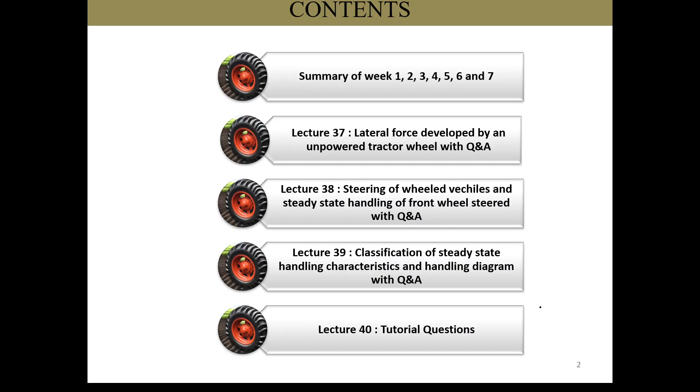I have given this recap many times before. So today I am showing you all the PPTs, and I'll check how much you have remembered. This is the week 1 presentation. If there is any MCQ, then I will ask you.

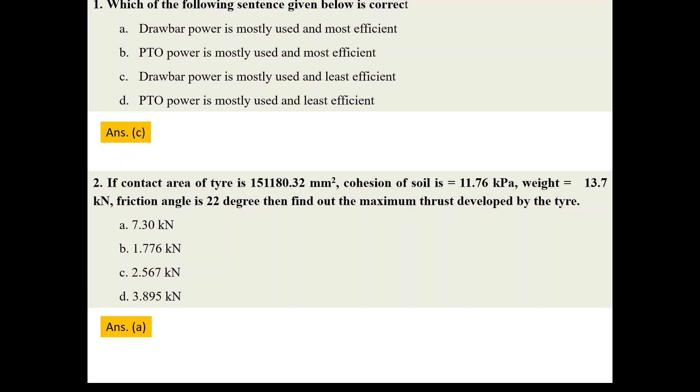I think this is easy. Which of the following sentences can be used correctly? These things are easy. Now in week 2.

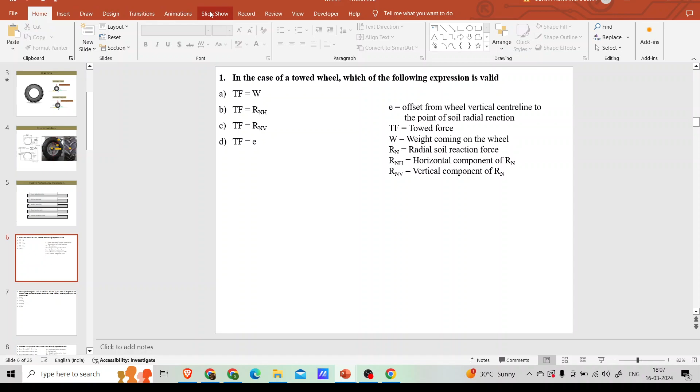Traction. What is the answer of this question? In the case of a towed wheel, which of the following expressions is valid? Do you remember, Sivaram? As this is the last lecture, I'm just giving a recap. In case of a towed wheel, which of the following expressions is valid? Do you remember, Sivaram? Any guessing? In case of a towed wheel, weight is acting, towed force is there, and torque is zero.

This towed force is being balanced - it balances the rolling resistance, and ground reaction is acting. If R is the ground reaction, then this is RNH or RNV? See what I mean? In case of a towed wheel, yes sir, which option is correct? Towed force is being balanced by the horizontal component of the ground reaction, RNH. So TF is equal to RNH.

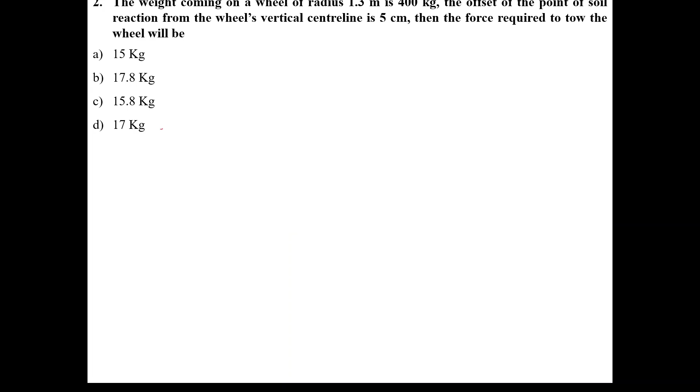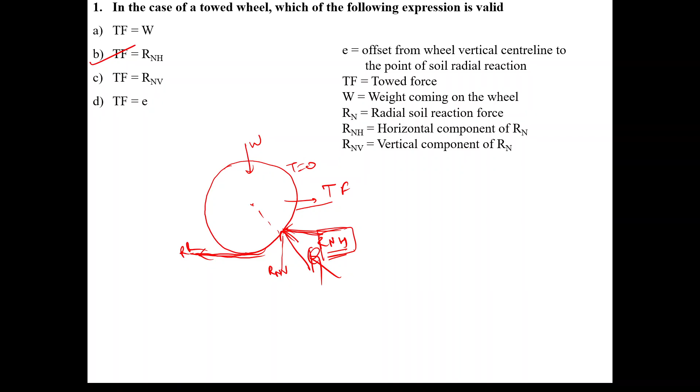Do you remember these concepts? I think you have forgotten. I need to revise those once again. That's why, for revision only, I am asking you these questions. You revise here, no issue. Just try to solve with me. This is numerical, we will leave it.

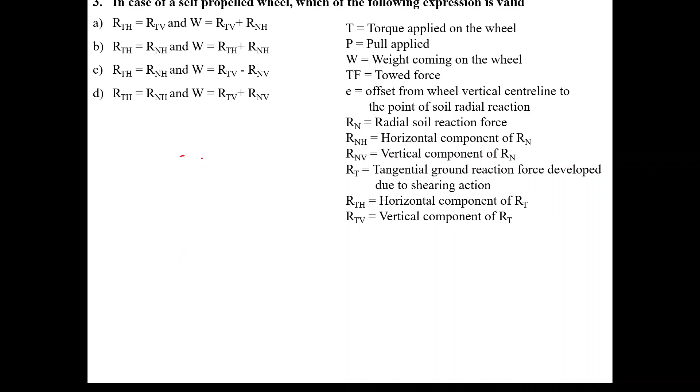In case of a self-propelled wheel, which of the following expressions is valid? Do you want to solve it or shall we move on? In case of a self-propelled wheel - okay, you just tell me the concept of a self-propelled wheel. What is a self-propelled wheel? I'm asking you just orally - if you are being asked what is a self-propelled wheel, what will you answer?

The self-wheel can produce its own torque, sir. A self-propelled wheel is a wheel in which there is no pull - without pull, just torque is being given to it. Means power is being given to the wheel, and there is no pull attached to the wheel. That is a self-propelled wheel. And what is the driving wheel or powered wheel?

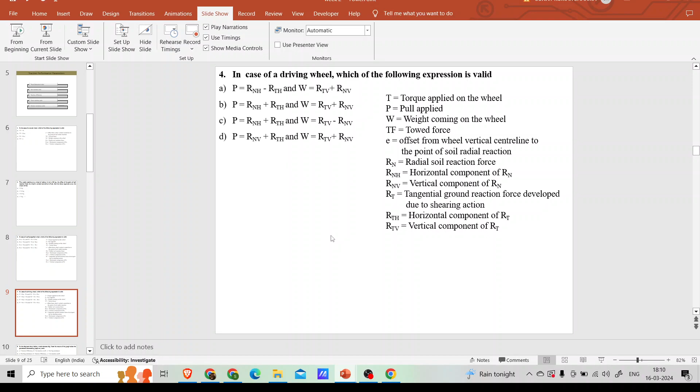Driving wheel or powered wheel - the pull is attached to the wheel, and that is powered. That is a driving wheel. Means pull is also there, and torque is also there. That is a powered wheel. Okay, solve this question just for a revision.

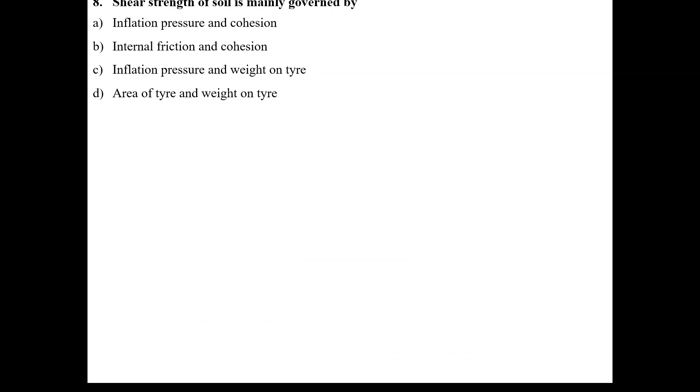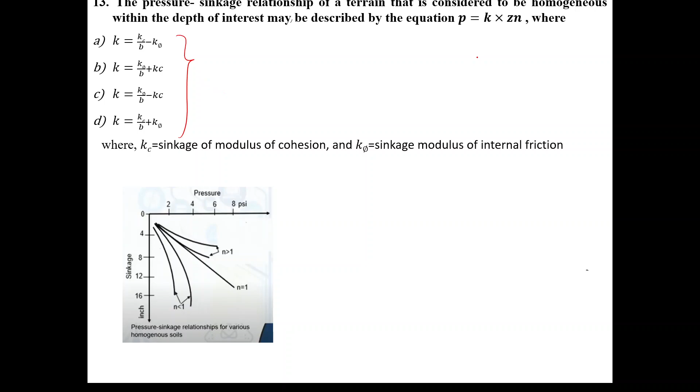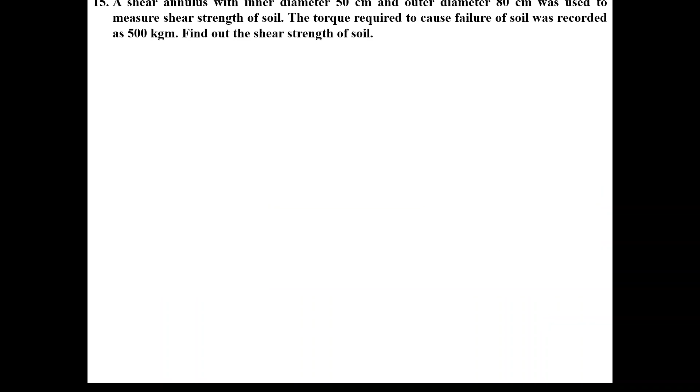This is also a simple system. You will solve the marky things. Okay, what is in this equation? Which of the following is the correct equation? Option D, sir - K is Kc by B plus K phi. This we have already solved.

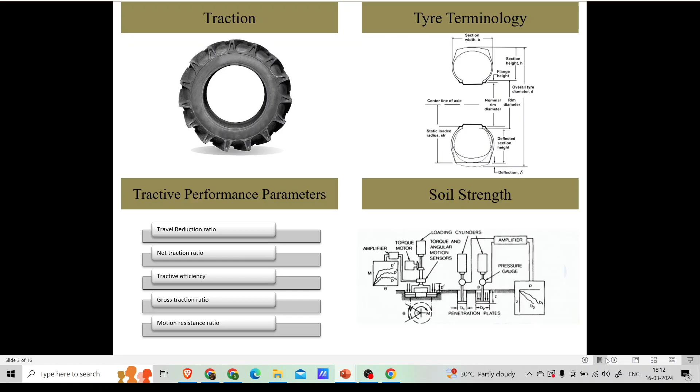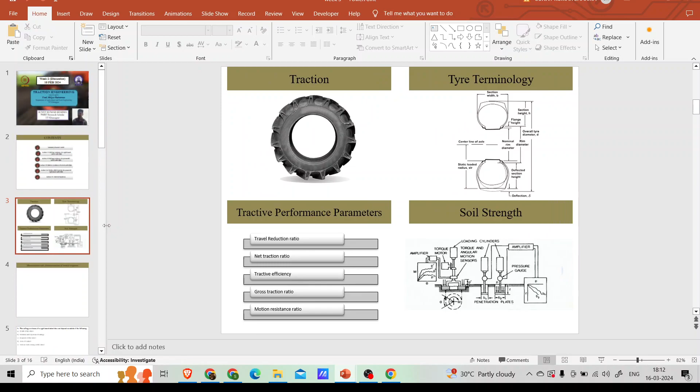In week 3, what we saw - the rolling resistance of a rigid towed wheel does not depend on which of the following? This question I told you is wrongly framed, actually, because as diameter increases, contact area will also increase. I said the area of contact is the answer, but diameter and area are the same thing.

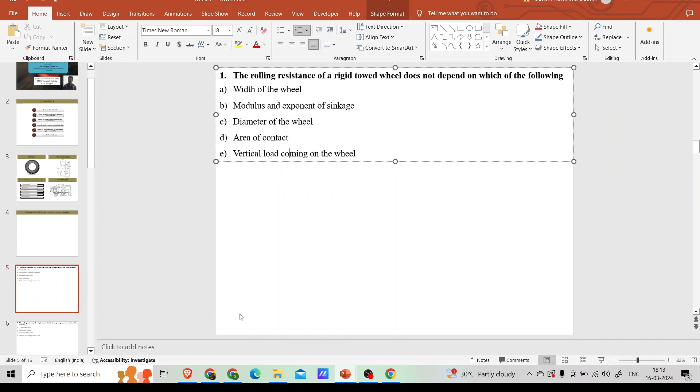Then: rolling resistance of a rigid wheel is directly proportional to which of the following? Do you remember this? Yes, sir - diameter of the wheel, sir. Let me check.

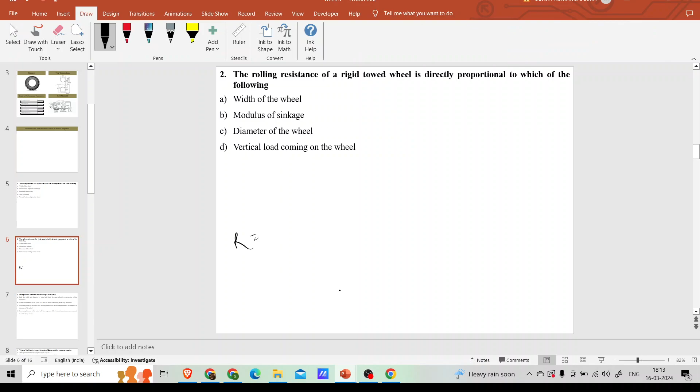Rolling resistance is directly proportional to the weight coming on it. This equation, this expression I told you in this lecture, means R is bk by n plus 1, 3w by bk root 2r, 3 minus n, some power 2n plus 1.

If we break this n component and separate all the b, k and everything, it is negative power, k is also negative power, 2r which you said diameter is also negative power, weight coming on the wheel is in positive power. So this whole thing is diminishing the rolling resistance. If we increase the diameter, it will decrease rolling resistance.

And B is in our control. Yes, if we increase B, then it will decrease rolling resistance. If we increase W, then it will increase the rolling resistance, so that's the vertical load coming on the wheel.

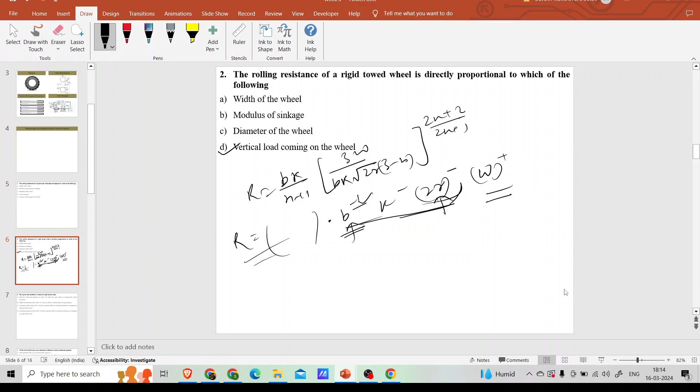Then for a given soil condition, in case of rigid towed wheel, this will be resistance of pneumatic wheel is due to... okay, this you tell.

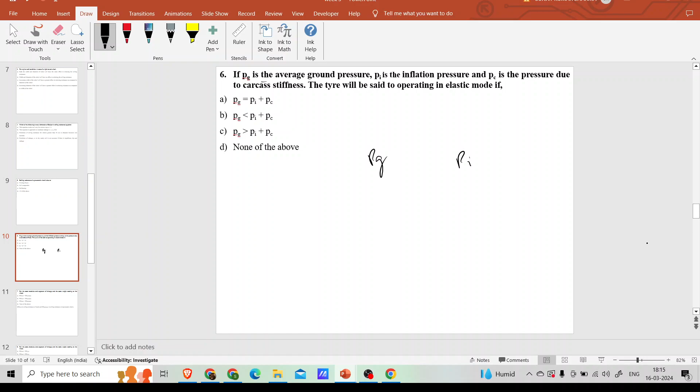If PG is the average ground pressure, PI is the inflation pressure, and PC is the carcass pressure, then PI plus PC - which of the following is elastic mode? It will be greater than, less than, or equal?

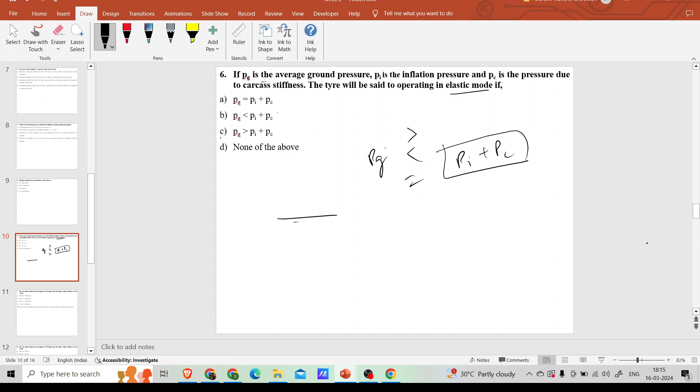PG should be greater than PI plus PC, sir. Which option? Option C, sir. Option C means PG is greater than, it is elastic mode. Yes, correct. For the same modulus and same...

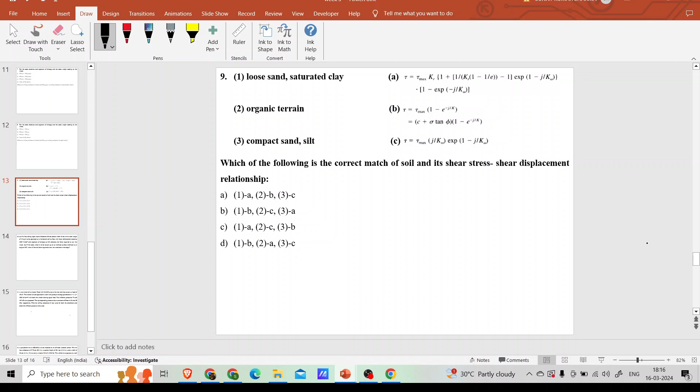This also I have explained it. Do you remember? If you don't remember, you can leave this question. Then numericals.

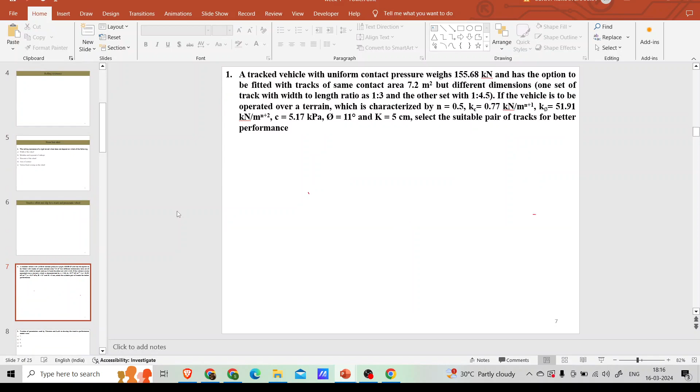Then in this fourth week, we discussed numerical. Okay. Wismer and Luth - how many parameters did he choose? Did he take for developing the tractive performance model? Okay, tell me this, tell me answer of this question.

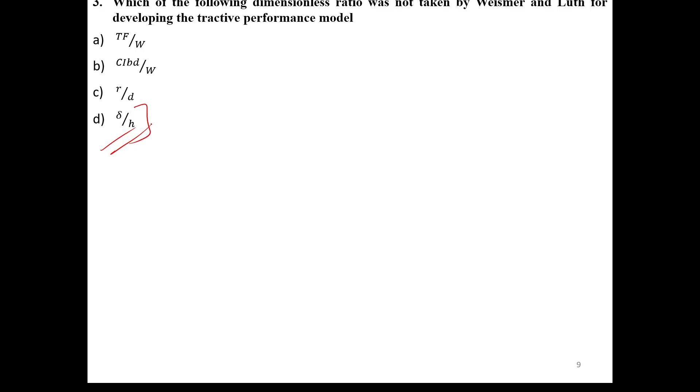Which of the following dimensionless ratio was not taken by Wismer and Luth? It was del by h. Which of the following is not a limitation taken by Wismer and Luth? Cone index - this I've explained.

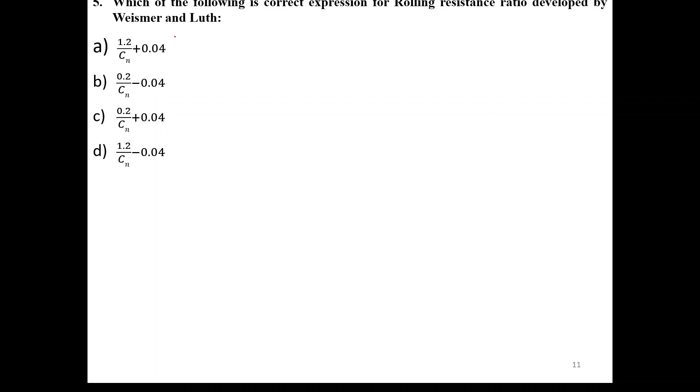Okay, tell me the rolling resistance formula of Wismer and Luth. Option A, sir. Correct. Mu gross traction ratio formula, option C.

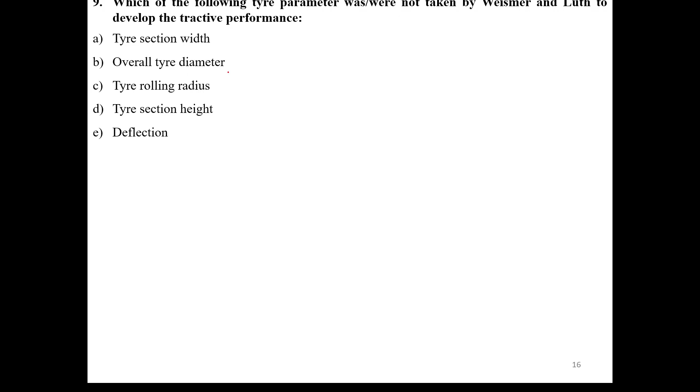Brixius, he took 11 parameters. Which of the following parameter was not taken? This thing we have seen in the previous question. Ratio of rho R by D. Do you remember the ratio? I think it is 0.474.

Yes, okay. Mobility number - this you have to remember all the time. Which is correct? Sivaraman? Option D. Option D, sir.

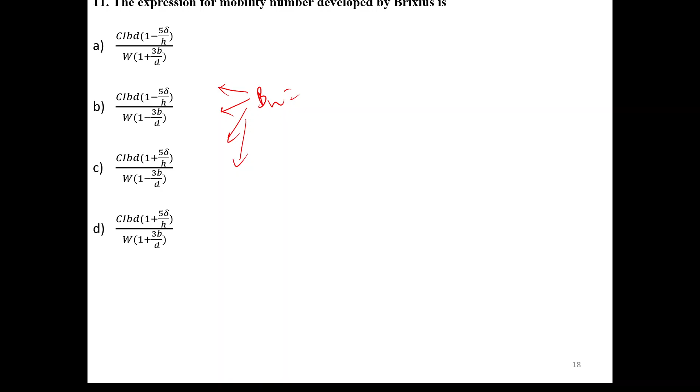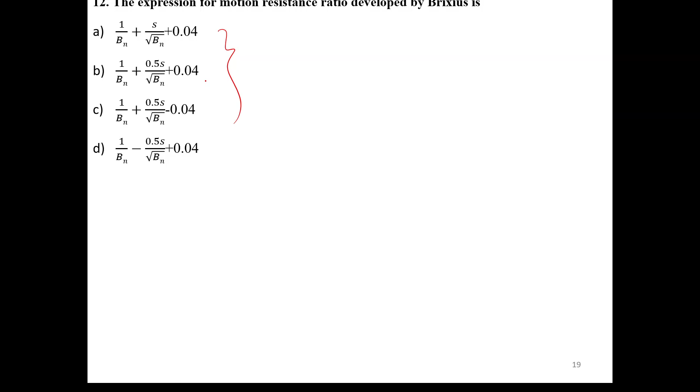Yes, yes, correct. Motion resistance ratio of Brixius. And this gross traction ratio.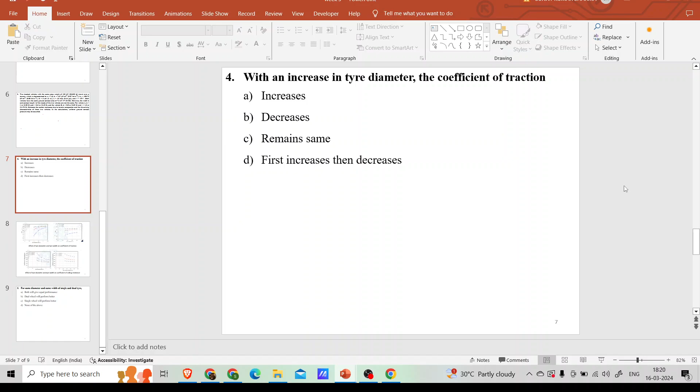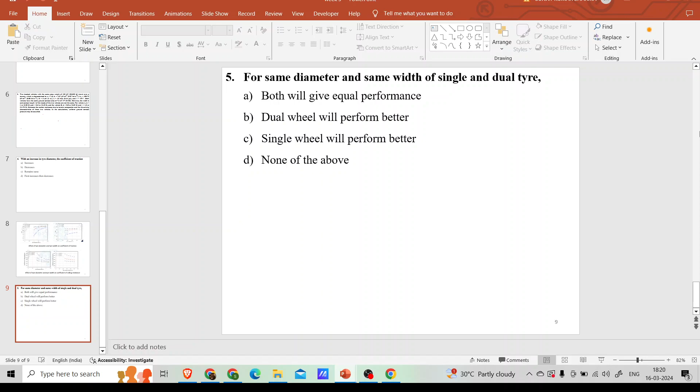For the same diameter and same width, single and dual tire - will perform better. Perform better. Mm.

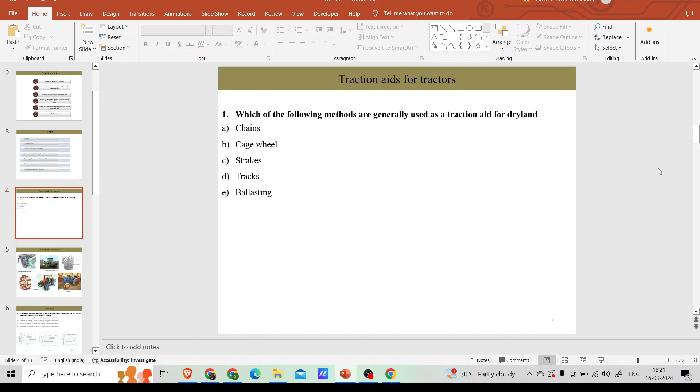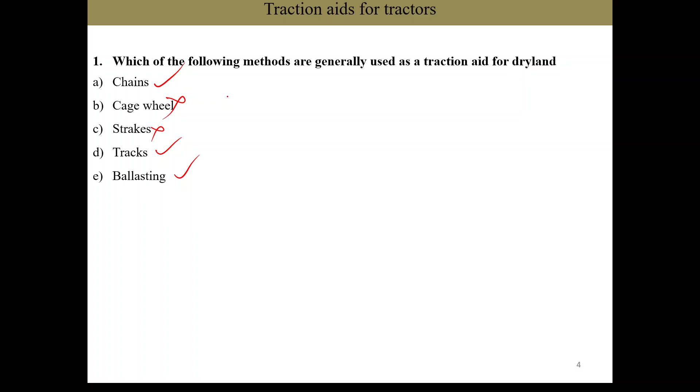This is the last class. Which of the following methods are generally used as traction aid for dryland? Chains, yes, for dryland. Cage wheel is for wetland. Strakes for wetland. Tracks, ballasting.

A, D, E. Answer this question - this I explained last Saturday. This is optimal ballasting, under ballasting, or over ballasting. First curve.

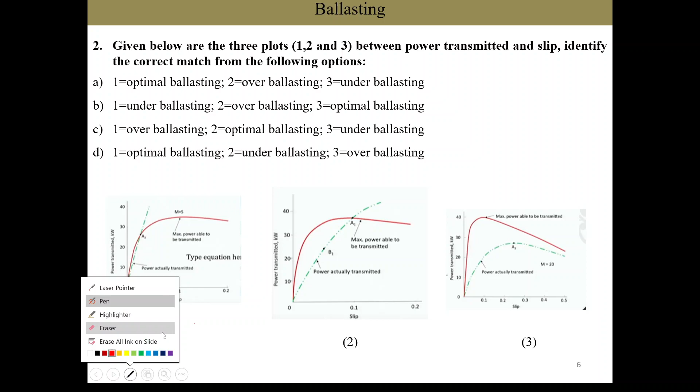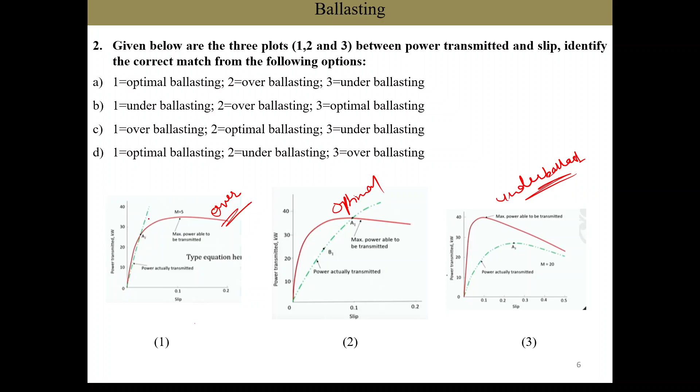Under ballasting, sir. This is over ballasting. This is optimal ballasting, and this is under ballasting. Regarding this, we also solved a numerical in which we saw how this curve has been plotted in this equation. These all curves we obtained last week.

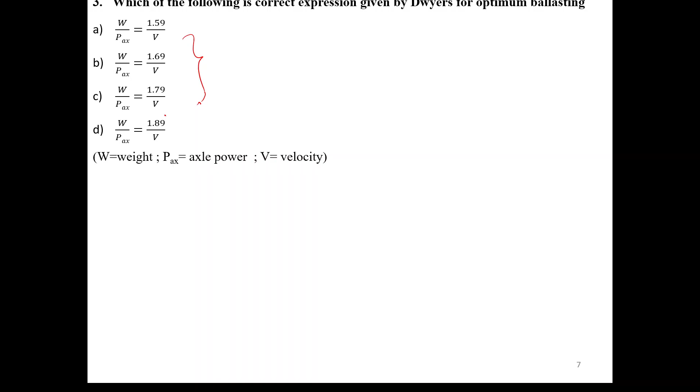Okay, which of the following is the expression known as Dwyer's equation for optimal ballasting? Option C, sir. Hmm, correct.

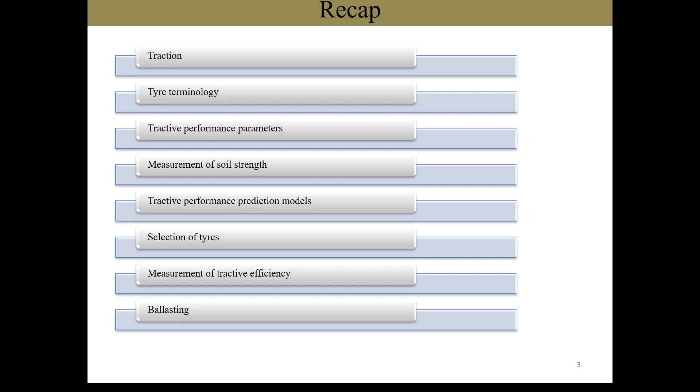Okay, so we have given a summary. We did a revision, and then today we will see the lateral force, cornering stiffness, mainly the stability of the vehicle while steering. We will see this week.

Which of the following is the expression correct? Which of the following expression correctly represents the relation between coefficient of lateral force and slip angle? Have you seen the lecture? No, sir, I didn't see it, sir. Okay, then you will not able to answer.

You just guess which of the following can be a correct option. Option C, sir. Option C, yes.

Option C, not option C, no. Option A is the correct option, where CLF is the coefficient of lateral force, alpha is the slip angle, and A and B are constants.

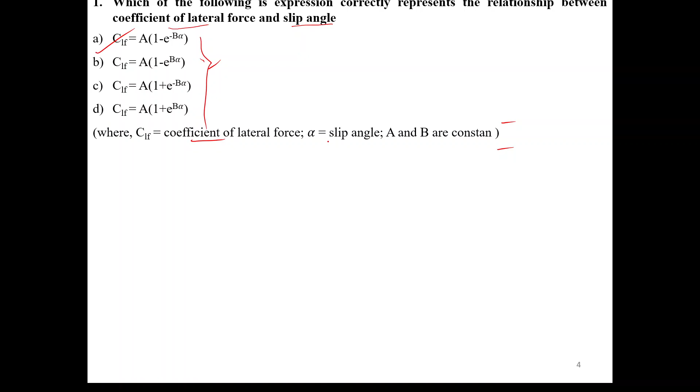So if this is a wheel, suppose it is turning, some force is acting perpendicular to this wheel. This force is rolling resistance force. This force is lateral force, which always acts. We will discuss this in this lecture. And this coefficient of lateral force has this relation.

So first, if a vehicle is moving, it has three motions in three planes. Do you have any idea what the velocity in the x direction is called? If this vehicle turns in this direction, what is this motion called? And if it turns in this direction, like this vehicle turning, what is this motion called? And if this vehicle is moving, turning like this, what motion is this?

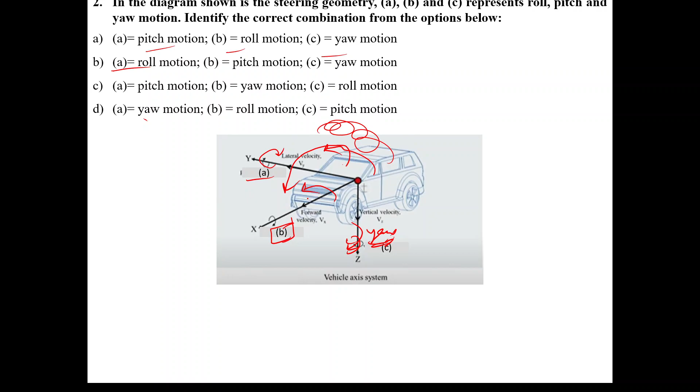Okay, which of the following is the correct expression relating steer angle, track width, and wheel base? Or you can also say which of the following is the correct expression for perfect steering. If the vehicle is steering, which expression defines the correct steering?

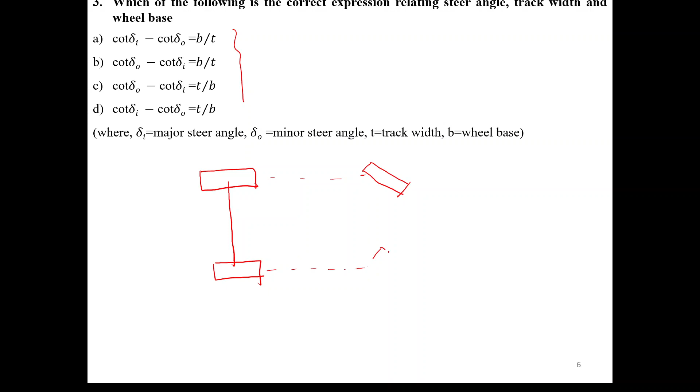T is track width. So this is T or B. Which is track width, this one or this one? B is wheelbase, you tell me. This red color or maroon color is wheelbase or track width, and this blue color is wheelbase or track width.

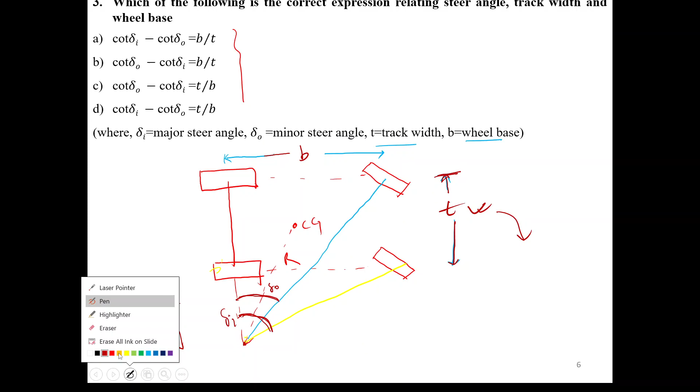Cot delta I, means simple mathematical expression. Cot del I is, this is our b and this is x, so cot del I is cot theta. This we have studied in class 10.

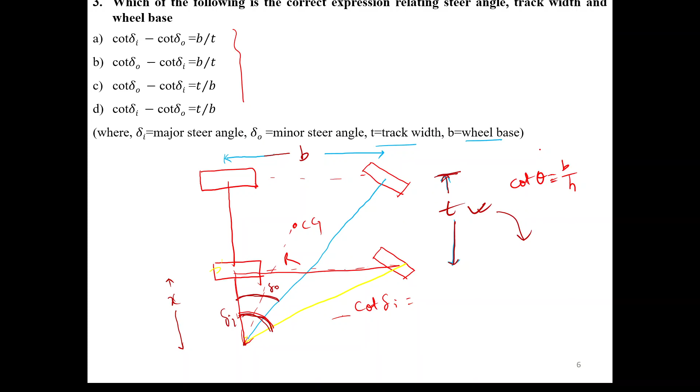Cot theta is b by h. If this is b and this is h, this is theta. Tan theta will be height by base. Cot theta is base by height. So this base is x and height is b, giving x by b.

Again, cot delta O. Cot del O is, for cot delta O, what will be the base? For this triangle, for cot delta O, you see this triangle, and tell me what is cot delta O. This is delta O. In mathematics, we write height as perpendicular, meaning b by p.

Express X plus T by B as the answer. X plus t by v, b. Now cot delta I minus cot delta O is equal to x by b minus x plus t by b.

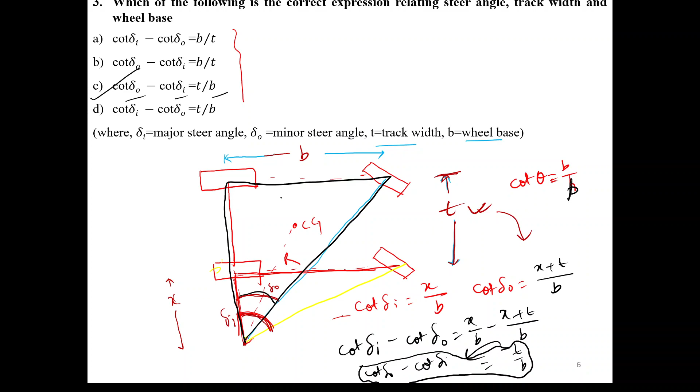This is equal to minus t by b. Now you move the minus sign, sending minus to this side. So this will become cot delta O minus cot delta I is equal to t by b. Means cot delta O minus cot delta I is t by b. Understood? Yes sir. This is for perfect steering condition.

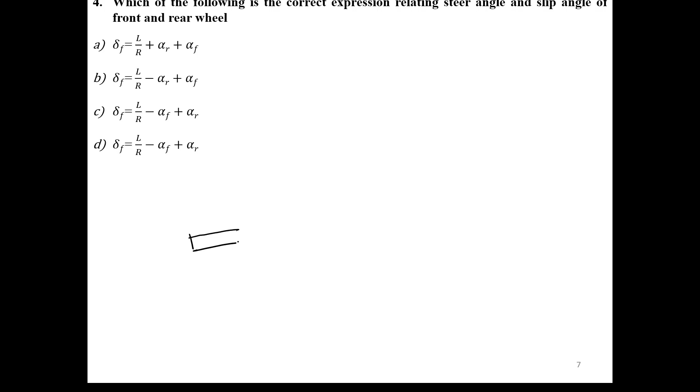Now the vehicle will not always go perfectly because some lateral force acts on the wheel. Suppose this is the inner wheel which we have drawn, meaning the first wheel we are omitting right now. This is center of gravity. So while turning, this is the center line of the wheel. So this is the steer angle, delta F. This is R.

In the first slide what I said is there always acts some lateral force, which is denoted by Fs, lateral force, suppose L, and this is rolling resistance force, suppose Fr. So this will give a resultant force in this direction. This resultant force will make some angle with the line of motion of the wheel, and this angle is called alpha F, and this is called slip angle.

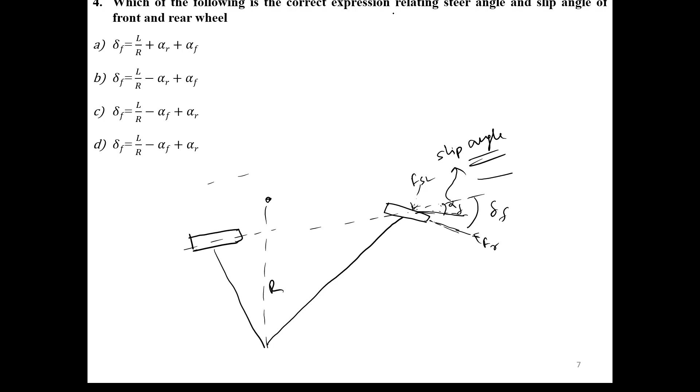So the question is, which of the following is the correct expression relating steer angle and slip angle of front and rear wheel?

The same thing you imagine for rear wheel. If you have not seen the lecture, then you can only guess, but I will explain how this expression came.

So this thing you have understood, what is slip angle, what is steer angle. Sivarma, sir, what is the difference of slip angle and steer angle? Have you understood?

This is wheelbase L. This is L, this is R, radius of curvature.

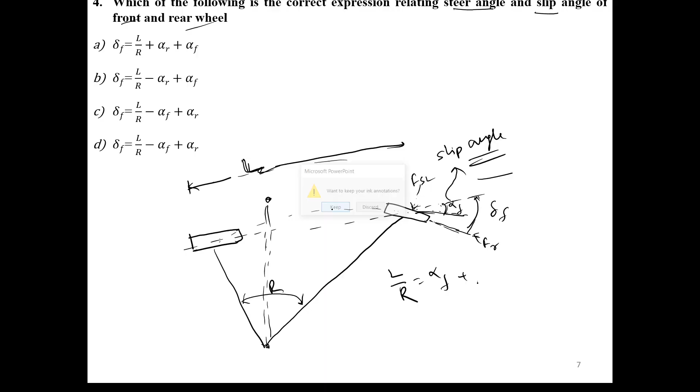So if you suppose this as an arc, then L by R will be given by alpha R plus beta plus delta F minus alpha F minus beta, with this beta coefficient. And delta F is equal to L by R minus alpha R plus alpha F.

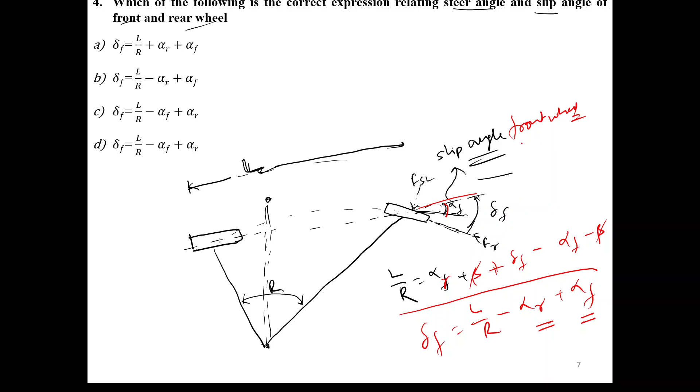So mainly you have to understand what is alpha R and what is alpha F. Did you understand what is alpha F? This is slip angle of front wheel, and alpha R is slip angle of rear wheel.

Sivarman, have you understood what is slip angle? So can you say the third thing, sir? There always acts some lateral force on the wheel, perpendicular to the center line of the wheel.

Along the line of the wheel, the force is rolling resistance force, and this is lateral force. So this force will give a resultant force. Suppose this is the resultant, and due to this, it will create a slip angle.

Means this resultant, the angle of this resultant with the line of motion, is the slip angle, and the center line of the wheel will make an angle with the line of motion of the wheel, and that angle is the steer angle, delta F.

In the previous slide, what we discussed is the steer angle. Now we are discussing the relation with the slip angle. So this equation we will get when we do the geometry of this whole arc and all, we will get this equation.

And when you balance the moment, this W V square by GR is the centrifugal force acting on the wheel, acting on the tractor or any vehicle. If you balance this whole equation, then you will get this F.

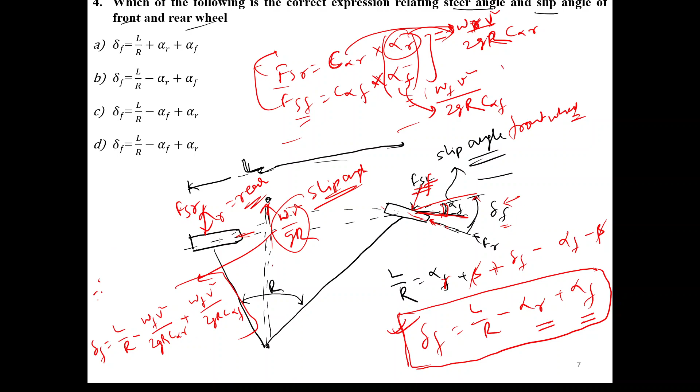You take this V square by 2GR common, then what you will get is L by R.

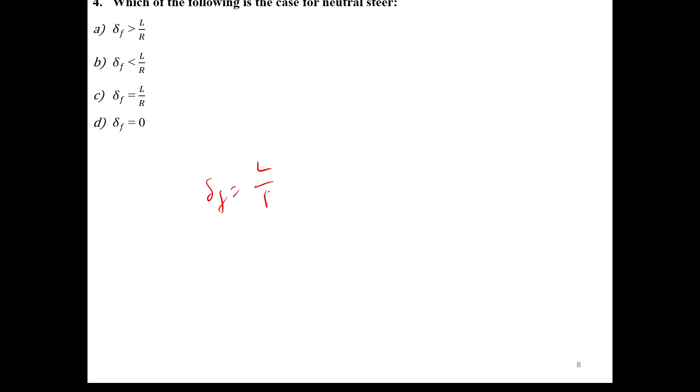Then what you will get is delta f is equal to l by r minus v square by gr, times wf by c alpha r minus wf by c alpha f.

This expression is called the understeer coefficient, or KUS.

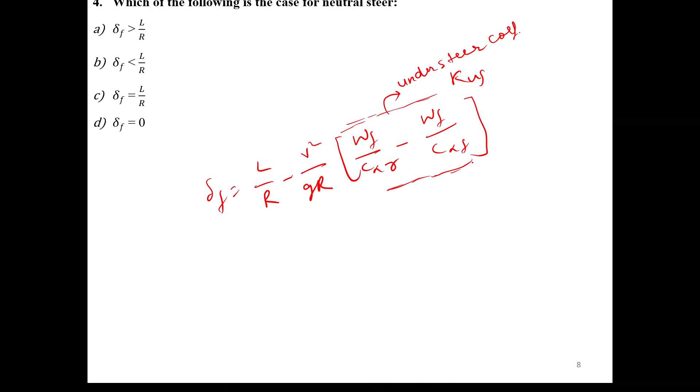This decides whether the vehicle is understeered, oversteered, or neutral steered. This expression will decide.

So, which of the following is the case of neutral steer? As you have not seen the lecture, from whatever I've just said, you can guess what can be neutral steer. In case of neutral steer, what will happen to this equation? If this is the understeer coefficient, then which of the following is the case of neutral steer? What is your answer?

Option C, sir. Yes, this is correct. In that case, the understeer coefficient will be equal to 0, meaning this equation will be 0, and this will be equal to this. The weight by cornering stiffness of front and rear will become equal, and this will be a neutral steer. I will explain what is neutral steer, what is oversteer, and what is understeer.

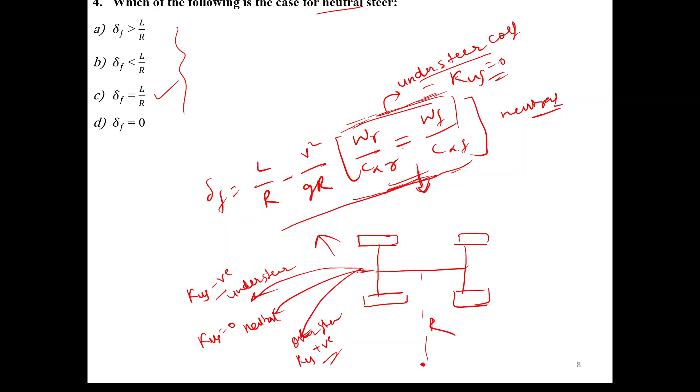So this can become more clear when we solve two or three questions. Then this can be more clear. It will become this practical based question.

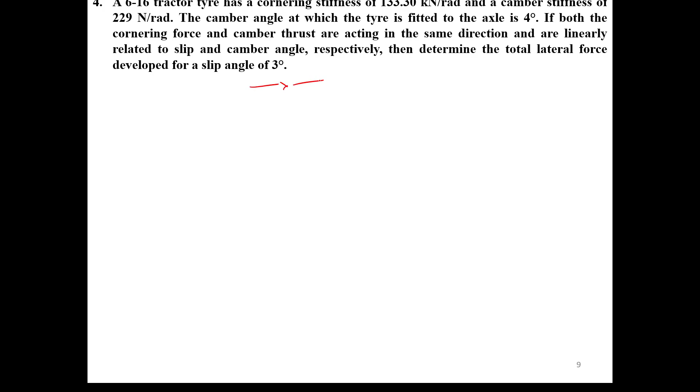So the first question is: a 6-16 tractor tire has a cornering stiffness of this much Newton per radian, a camber stiffness of this much Newton per radian. The camber angle at which the tire is fitted to the axle is 4 degree. If both the cornering force and camber thrust are acting in the same direction and are linearly related to slip and camber angle respectively, then determine the total lateral force.

On any vehicle, a lateral force acts - suppose Fs is acting as the lateral force. This is the summation of the lateral force due to the cornering stiffness. Cornering stiffness is due to the slip angle alpha, and it is also due to the camber stiffness, which is due to the camber angle. So this is the summation of stiffness due to slip angle and stiffness due to camber angle, denoted by gamma.

And this is the summation of the coefficient C alpha into the angle. If it is slip angle, then alpha, and if it is camber angle, then gamma, meaning C gamma into gamma. So what you have to do is multiply the cornering stiffness, 133.3 kilonewton per radian, into the cornering angle, which is the slip angle. Cornering stiffness is due to slip angle, so this will be multiplied by 3 degree.

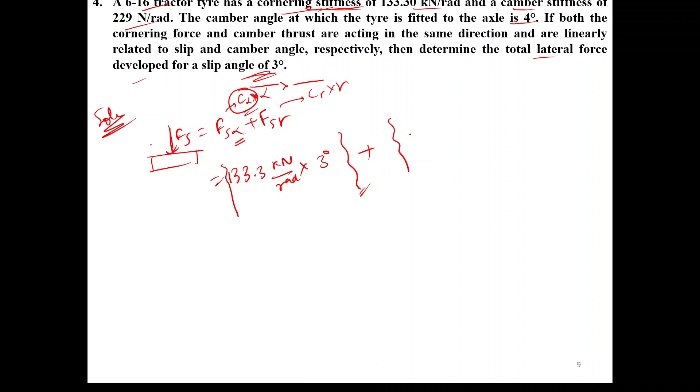This is due to slip angle, and another lateral force will act due to camber angle, and that will be 229 Newton per radian into 4 degree. This 4 degree is the camber angle.

So have you understood this problem and what I just elaborated? Sivaraman?

Can you explain what is camber stiffness, sir? Cornering stiffness is due to slip angle. Slip angle you have understood.

Yes, sir. When this lateral force and this rolling resistance force combine, this will give a resultant force. This resultant force will make an angle with the vehicle center line - this angle is the slip angle. Due to this slip angle, we get a cornering force on this wheel, and due to camber angle we get camber stiffness on this wheel. The summation of camber stiffness and cornering stiffness gives a resultant force which is the lateral force denoted by Fs.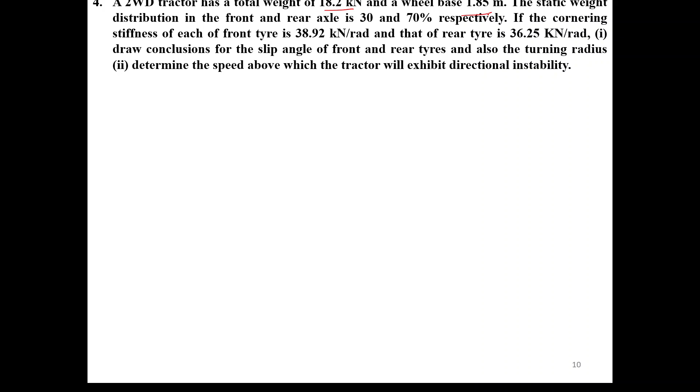Now you see the next question. A two-wheel drive tractor has a total weight of 18.2 kilonewton and a wheelbase of 1.85. The static weight distribution in the front and rear axle is 30 and 70%, sorry, 70%, 30%. Weight is 18.2 kilonewton, wheelbase is 1.85. If the cornering stiffness of each of the front tire is 38.92 kilonewton, meaning cornering stiffness C alpha of front tire is 38.92 and the rear tire C alpha R is 36.25 in kilonewton per radian. Then draw the conclusion for slip angle of the front and rear tire and also turning radius.

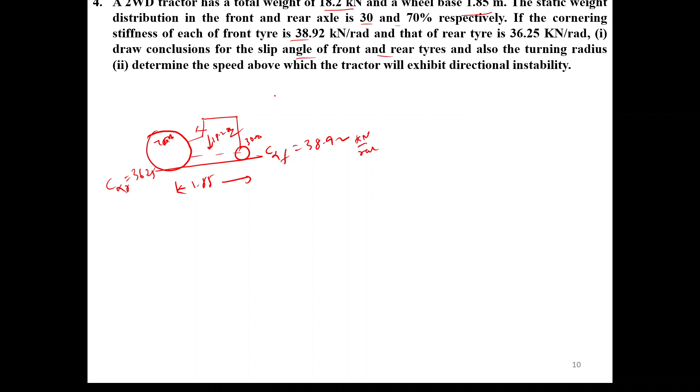Weight coming on the front wheel is 18.2 into 30%, 0.3 is the weight on front axle, divide by 2 you will get weight coming on the front wheel. So weight coming on the front wheel is 18.2 into 0.3 divided by 2, divided by cornering stiffness of the front wheel, that is 38.92 kilonewton per radian. This is also in kilonewton. This we have written as 18.2 kilonewton, so there is no problem.

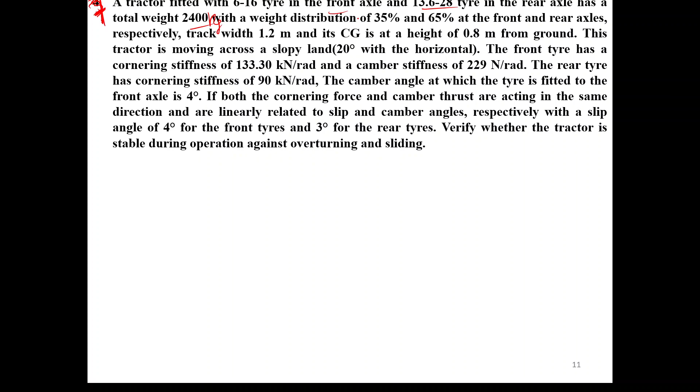A tractor fitted with 6-16 tire in the front axle and 13.6-28 tire in the rear axle has a total weight of 2400 kg, with a weight distribution of 35% front and 65% rear axle. Track width is 1.2 meters. Track width is this 1.2 meters. Center of gravity is at a height of 0.8 meters.

This tractor is moving across a sloped land, 20 degrees with horizontal. Suppose this is the land, 20 degrees with horizontal, this is the vehicle, this is the front wheel.

Cornering stiffness and camber stiffness for the front tire is given. For the rear tire, the lateral force is due to cornering stiffness only. The camber angle at which the tire is fitted to the front axle is 4 degrees. If both the cornering force and camber thrust are acting in the same direction and are linearly related to slip and camber angle respectively, with the wheel slip angle of 4 degrees for the front tire and 3 degrees for the rear tire, then verify whether the tractor is stable during operation against overturning and sliding.

So for overturning, the critical condition, or the condition for overturning, is this. First you have to check if it is stable for overturning or not, then second you have to check if it is stable for sliding or not.

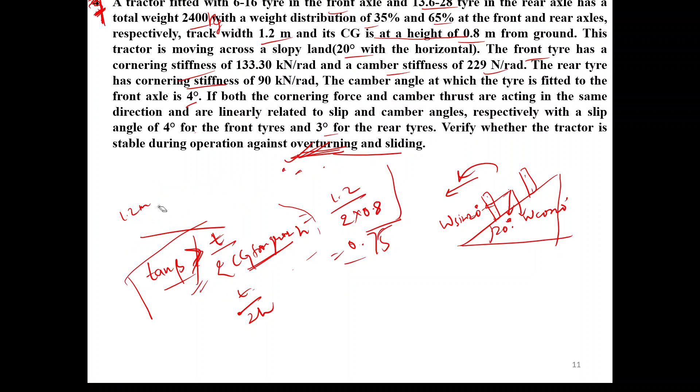So now we will check for sliding. For overturning it is safe. Now we will check for sliding. So for sliding, what we need to do is...

Here the role of that lateral force will come. Lateral force means the force which is perpendicular, acting perpendicular to this wheel. This is lateral force according to definition.

So this lateral force is on the rear wheel also and front wheel also. And according to the question, the lateral force on the rear axle is only due to the slip angle. The front tire has cornering stiffness and camber stiffness, meaning the lateral force on the front tire is due to slip angle, or cornering stiffness, and due to camber angle, camber stiffness—both camber stiffness and cornering stiffness.

This both will add to the lateral force of the front wheel, and the camber angle at which the tire is fitted to the front axle. And for the rear axle, can you notice the rear tire has a cornering stiffness of 90 kN. It has just a cornering stiffness, not camber stiffness.

Do you understand this line? The front wheel has a camber angle. Do you remember the steering theory from before? The front wheel has a camber angle. What is camber angle?

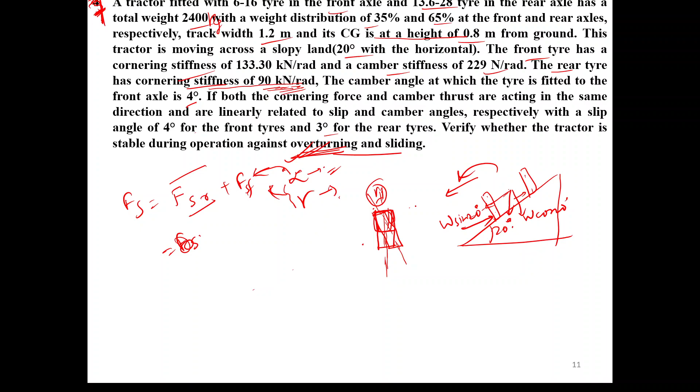That is not the case for the rear wheel. In the rear wheel we don't give any camber angle; it is simply straight when you see it from the vertical plane. But when you see the front wheel from the front plane, you will find that it is at an angle with the vertical axis. That angle is only in the case of the front wheel.

So the lateral force on the front wheel is due to camber stiffness and cornering stiffness. In case of the rear wheel, it is only due to cornering stiffness, or the slip angle.

So you have to do the cornering stiffness, coefficient of cornering stiffness C alpha for rear wheel, into alpha, the slip angle of the rear wheel. This will be the lateral force on the rear wheel.

For the front wheel, lateral force is due to cornering stiffness, that is C alpha F, due to slip angle alpha F, plus it is also due to camber stiffness, the coefficient of camber stiffness into the camber angle gamma. This is the lateral force on the front wheel.

When you do this summation, then we will proceed. C alpha R, the cornering stiffness of the rear wheel, is 90 kilonewton per radian. The slip angle of the rear tire is 3 degree, convert it into radian. This will be the lateral force of the rear wheel.

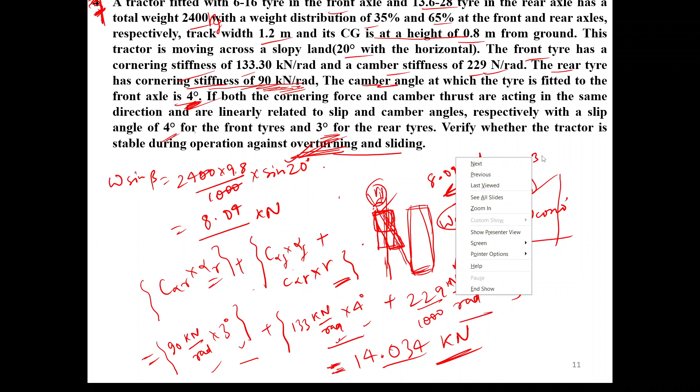So will it slide? Will this tractor slide? No, sir.

So have you understood how it will slide, what overturning and sliding problem means? I think your doubt about lateral force is clear now. It should be clear now.

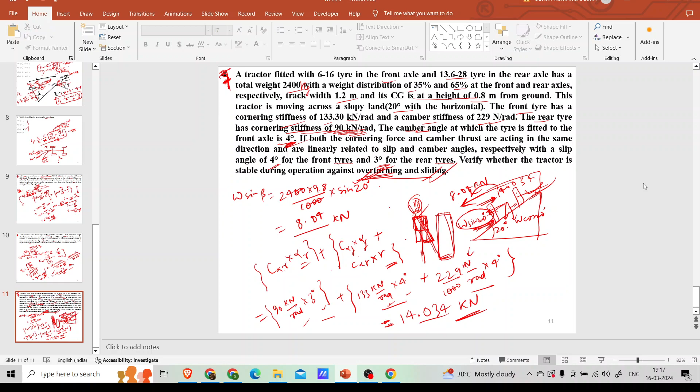Do you want to ask anything?

How is your weekly assignment going? Yes, sir, I did well. So you will do that after 2-3 days. What assignment will you do? That will be your last assignment. Yes, sir, okay.

Is there any doubt in the assignment? Any query or any question that is confusing, or anything like that? No, sir.